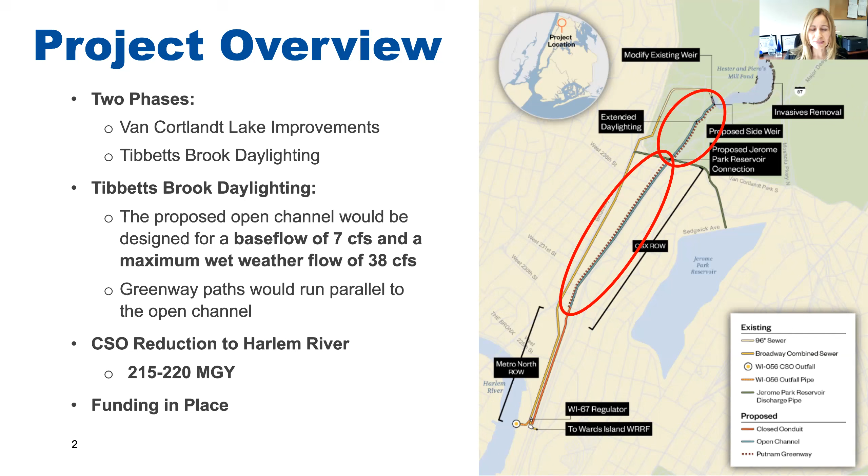So if you go to the next slide, please. The lake improvements - this is really a true product of John McLaughlin working with Meredith Larson from the Parks Department, as well as Stephanie and her team and you all, which we would like to bring restoration opportunities to the Van Cortlandt Lake. As we are already going to be boots on the ground building this project, we said, why not bring more invasive removal, some native vegetation additions, and so on and so forth. So that's what we are starting as the first phase, calling this the Van Cortlandt Lake improvements.

I think John already explained in depth what this restoration is going to look like. But again, on Thursday, we are going to take you to some of these points and actually show you what it's going to look like before and after. So we are excited about this opportunity.

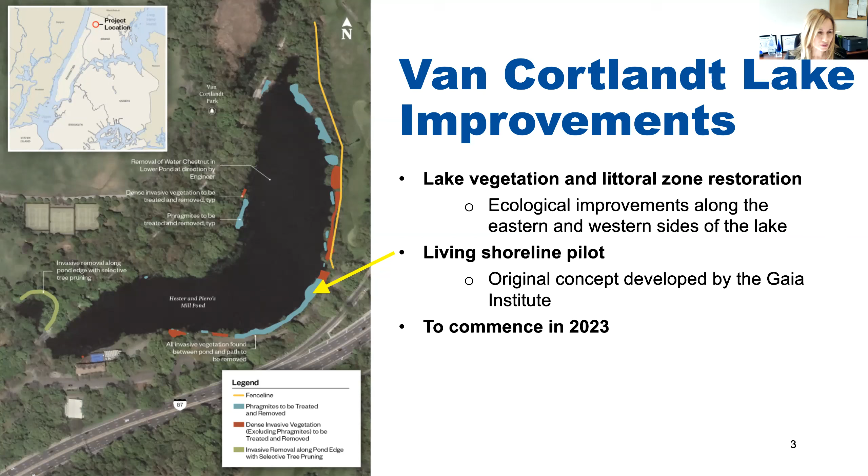Next slide, please. All right, so here is the meat of today's presentation. We are going to go over these potential public access features, which we will be showing a lot of pictures and a lot of schematics - what the greenway could look like, some pedestrian bridges where they are potentially going to be located. We heard from you that educational signage is important for this project, so we put additional interest on it and gave it further thought on where could be a good opportunity along the greenway to put these signs, including the seating and overlooks.

And also Amir is going to talk about the plazas and some other seating opportunities. I think it's going to be better realized when we do the field visit. But today we would like to show you this general overview of what we are proposing, and really receive your feedback at the end of today in the Q&A section, but mostly on Thursday face-to-face. And I'm really looking forward to meeting you all.

And with that being said, I'm going to give it to Amir.

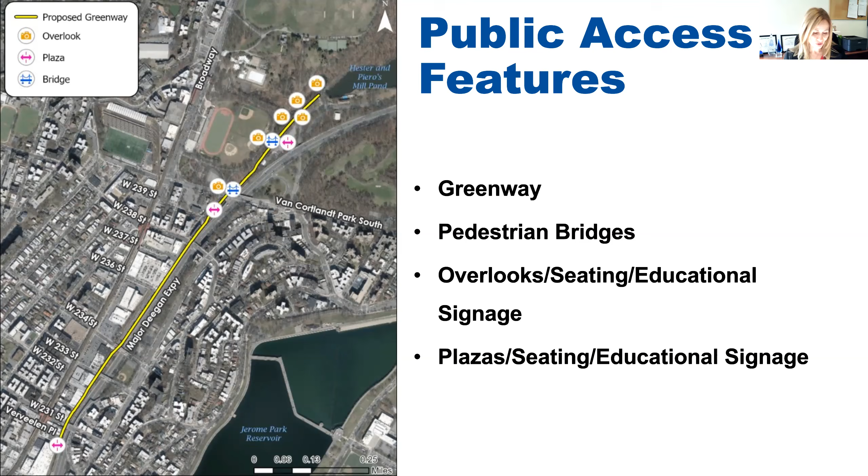So just building on what Pinar had just laid out, the next few slides, we're just going to go start from the beginning of the project and show you what the existing conditions look like and what we are proposing here. So next slide, Abhi.

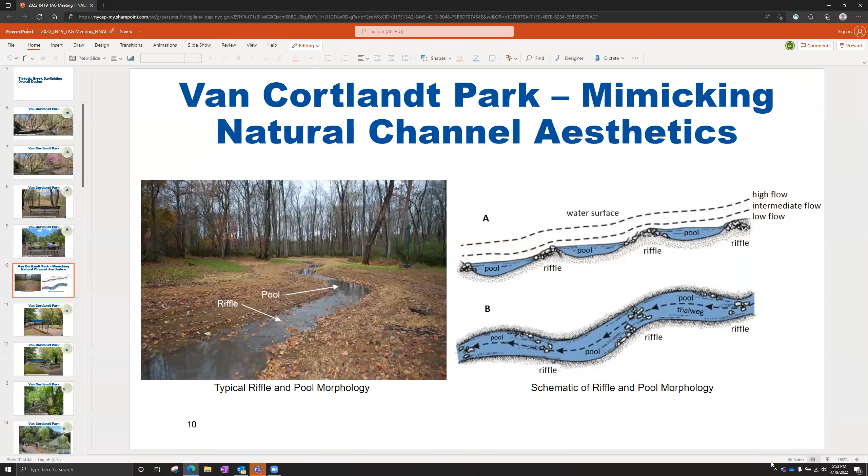This is giving you an example that in this part of the open daylighting, we are trying to mimic the natural channel aesthetics by providing a pool and riffle morphology. We have space here, and that will create a natural stream with associated pocket wetlands where some of the overflow waters can be temporarily stored, making this a total natural area restoration throughout the entire park. That's our plan for the design within the park.

Once we get into the CSX corridor, where it's more of a straight and narrow corridor, the morphology is going to change. We are still going to try and create some pools and riffles, but in a straight alignment, because there is not enough space there to create the meanders you're looking at here. But we will still include energy dissipation structures and pools and riffles, more in a straight alignment. Next slide.

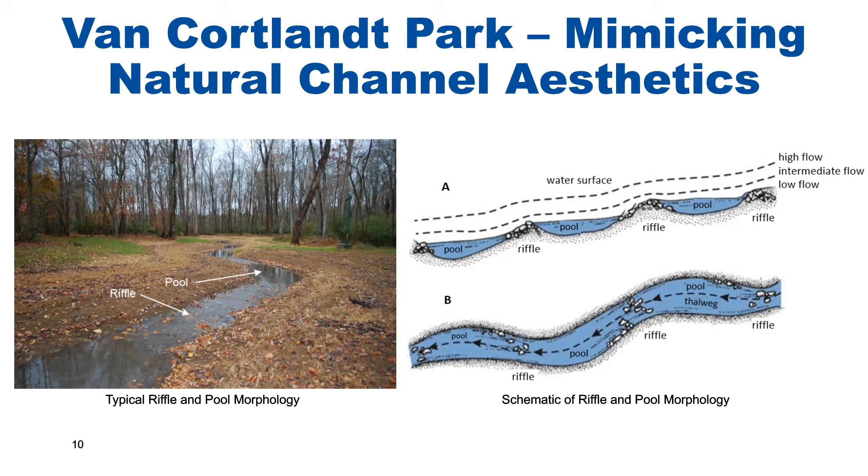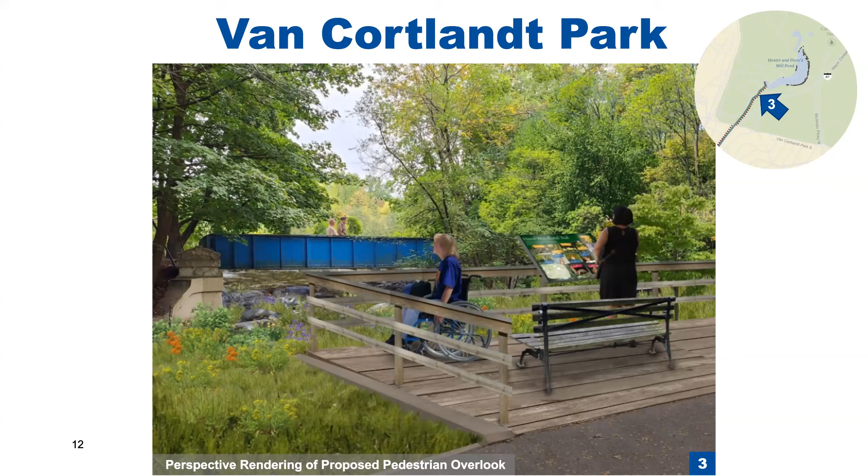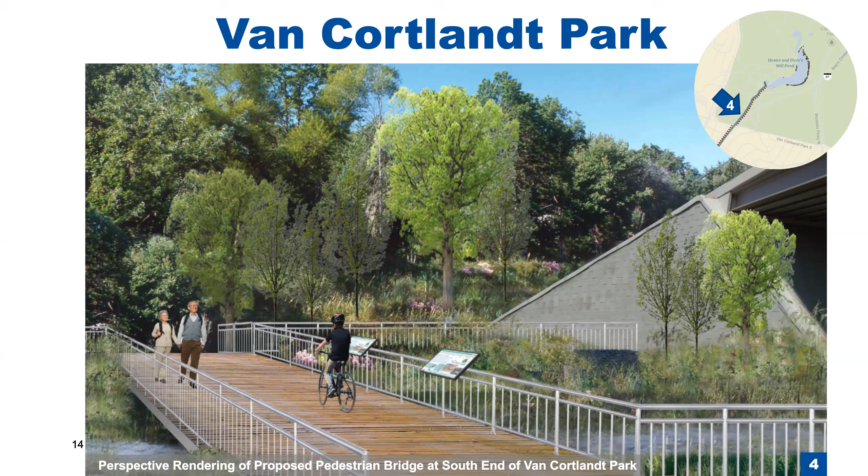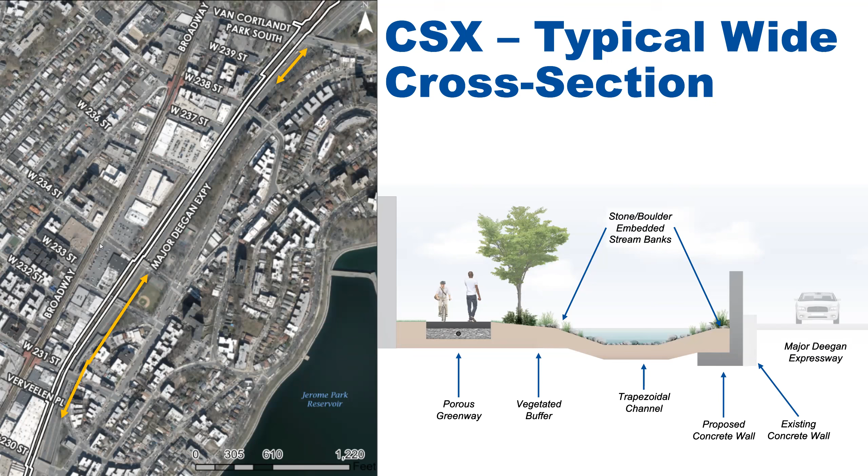This narrow section starts at 239th Street and goes right up to 234th Street. The one with the extra buffer is from Van Cortlandt Park South to 239th Street, and then it widens again after 234th Street right to 230th Street.

So the next point we wanted to talk about, as Pinar described, is the major point of discussion and feedback we need on the access points. As Pinar pointed out, we did a site reconnaissance and site visit of each of the streets that intersect the CSX corridor, starting from Van Cortlandt Park South.

So as you can see, we went through each of these 11 locations or access points, starting from Van Cortlandt Park South to 239th Street, 238th Street, 237th. We have a slide on each of these locations where we'll go through the constraints, the pros, and the cons for providing access from each area. Some are not feasible, but we'd like to build consensus on the most appropriate areas where we can provide access to the greenway and open channel. So the first one we'll discuss is Van Cortlandt Park South.

As you can see on the right, there is a picture here, but a couple of the key things we wanted to point out is from an access perspective, the elevation difference between Van Cortlandt Park South and the proposed greenway is about 18 feet. So it's a big elevation difference, and that would create some safety concerns.

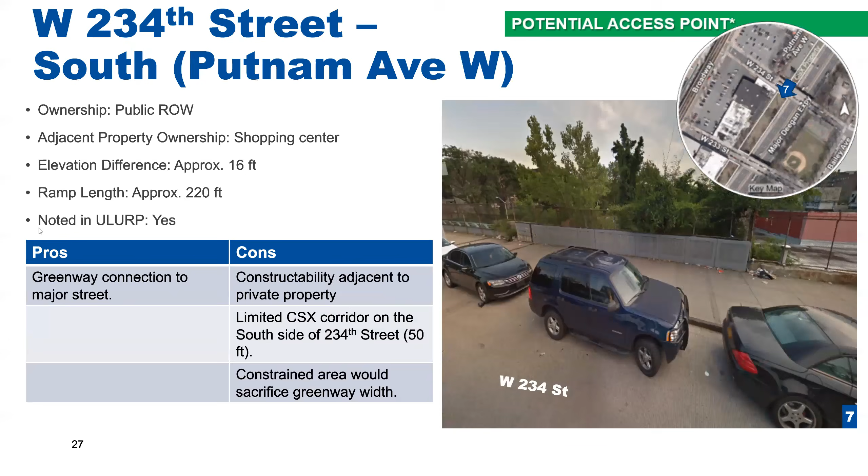In all cases, we are trying to provide a minimum of 2 feet buffer. In the wider section, we provide that buffer on both sides. However, in the narrower section, which is a cantilever, the vegetated swale is about 3 to 4 feet wide, so we're providing it from this barrier on the left side. The cantilever pathway has protective fencing on this side so that it keeps bicyclists and walkers away from the water and safe from the water. But right now, within the CSX, that's what we have.

Within Van Cortlandt Park, the bikeway is about 12 feet wide, giving 6 feet on either side, so you have larger buffers there.

Connection, I think it's cutting off, Sandy. I don't know if I'm the only one, but it's coming and going. Rob, did you get the answer?

Yeah, thanks. I understand that typically in the Deegan section it's 5 feet wide. I'm sure you guys are well aware, but where people are coming into the Greenway on the access points, you'll potentially have bicyclists moving at speed in either direction. Just having that safety idea of making sure there are good sight lines for the bicyclists as well as the people coming from the access points, and thinking about where people might queue if they have to wait for a bicyclist to come by, particularly if they're coming down a ramp, is something to think about.

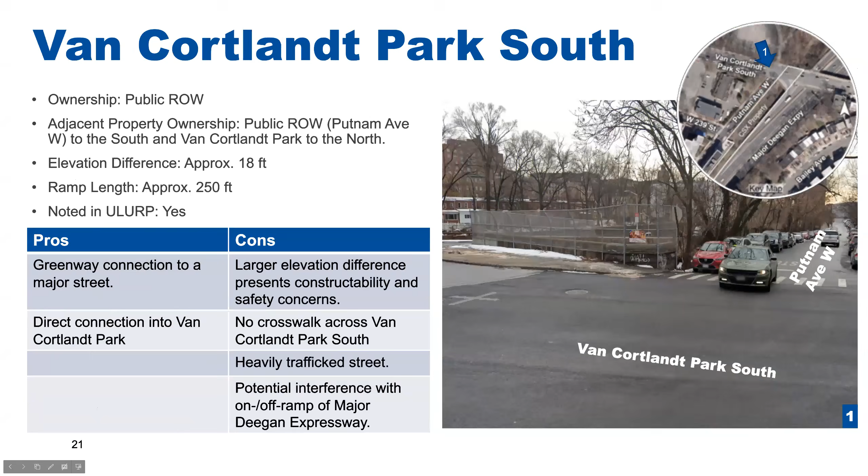That's not actually accurate. It is much more difficult to maintain day-to-day, so it would require an enormous amount of staffing to maintain. That's something that would have to be considered. Do you have that in your park? No, but we have someone on staff who worked in a park that had porous asphalt and can speak to that.

All right, we'll pick up the maintenance issue. As part of the maintenance responsibilities, we had to define the maintenance schedule for any proposed infrastructure improvements. That's definitely going to be part of the further discussions as we start finalizing the proposal.

The next one is about hours of operation. Camelia is asking, there will have to be hours of operation open for public access, otherwise it risks becoming a site out of sight, vulnerable to criminal activities. Is this a question to Mitch or Stephanie? Is there going to be an hours of operation for the park, similar to other parks?

Stephanie, chime in if you have something different to add, but I think it's still something that us here at Parks will need to determine what the best policy is. Of course, parks have different hours of operation, but they're not always fully able to be closed. If you think of Van Cortlandt Park, there's no way you could close off every single entrance, even though the park hours might end at dusk or midnight. So this is more of an area that might be possible to control. But also other greenways in the city, we consider those as necessary corridors to be open at all times for people that may be using them to travel safely off the street. So it's kind of a balancing thing. It's still a policy that I think we have to determine at Parks, but we do understand the potential safety questions with this corridor that's sunken below grade a bit. It's a little bit isolated.

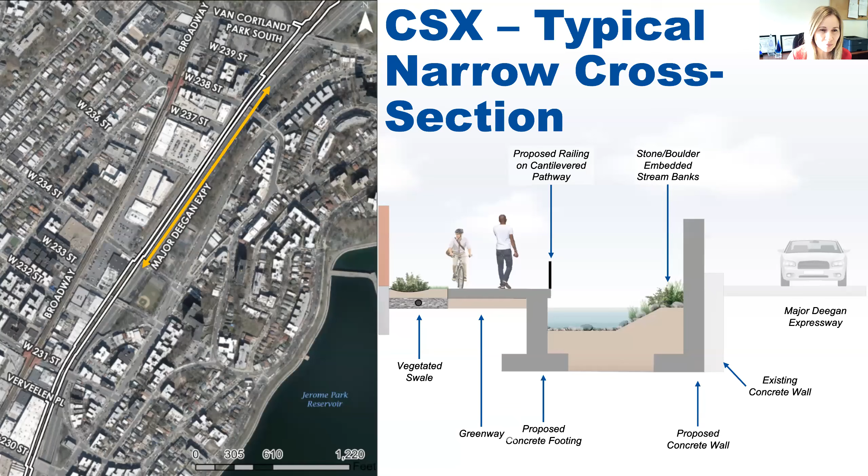The next one is a good one from Deborah, and she's asking, can we connect Verveelen Place to the Albany Crescent overhang on the other side of the Deegan? I think you can actually kind of see it in that picture. Just as a suggestion, because at Albany Crescent there's a metal overhang that's more than halfway over the Deegan already. In the little circle piece up there, you can see the metal squared off portion - that's Albany Crescent, the road. Then there's a metal corner that hangs over the Deegan. So it seemed like if you could even just extend it over that additional bit, you could run a ramp up, and that would get you to Albany Crescent and then Bailey, and then you're at 230th, but not on actual 230th. So, all right, just as something to put into the suggestion box.

Yep, I think we can visit that at the field trip on Thursday. All right, we'll make a note of that.

I think I'm going to skip your question, Robert, which we already discussed - the DOT's involvement, which Mitch mentioned they are coordinating with DOT closely.

The other one is from David, saying that we learned the hard way on the Van Cortlandt Park Putnam Greenway that making it ADA accessible also enables powered vehicles, mini bikes, ATVs, and so on. How will you address that danger?

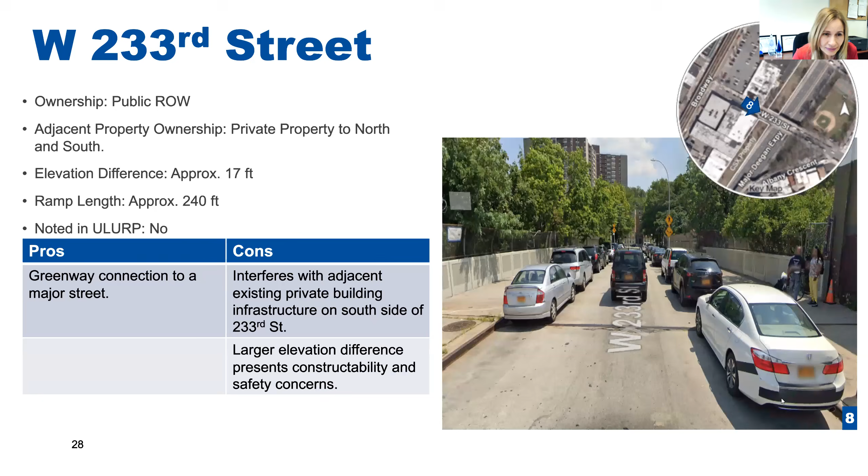Mike is asking, does the Naples Terrace Step Street between 231st and 232nd, west of Broadway, cross over to the east and extend to the CSX tracks? That corridor appears to be used for parking. The land could be owned by the city as a paper street, like Putnam Avenue was.

Do we know, Pinar? That's something we can investigate. I think the ownership was not clear. Dahlia, if you're on the line, or we will investigate and be sure we have that answer when we meet on Thursday. Indeed, we looked into that, and it is privately owned. It's a main loading access, elevated above those properties. We can see the white buildings.

So Naples Terrace doesn't actually go all the way across Broadway, and that part is part of a private lot. But we'll walk by that on our way Thursday. And there is an elevation difference, right? Because it is elevated there. Yeah, there are stairs currently that go past there on the back of that building, so there are also access issues associated with the current building. I also walked by it last week, and I know this entrance is gated right at Broadway.

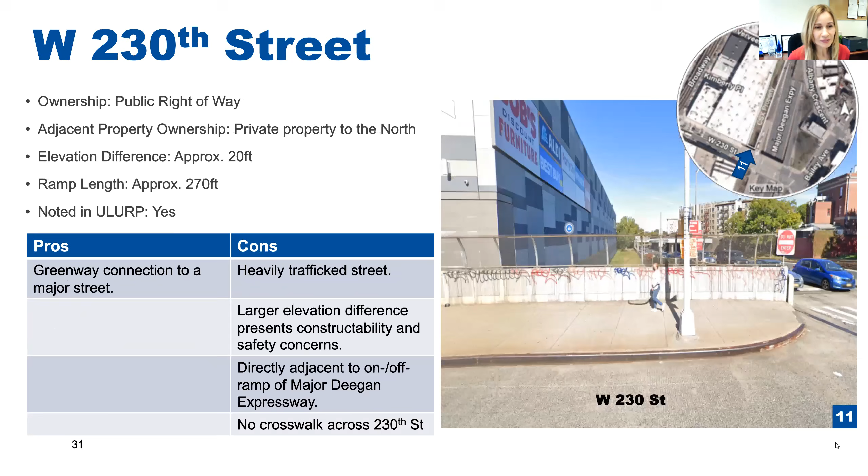All right, I believe I covered all the questions. Anything else? It's kind of open floor. We have 10 minutes left. A lot of information, more to be picked up on Thursday for sure.

Here's again the slides. We want to show you where the field visit is going to be happening. So we are starting sharp at 9 a.m. at the Van Cortlandt Golf parking lot. Stephanie covered that. So we are very much looking forward to seeing you all.